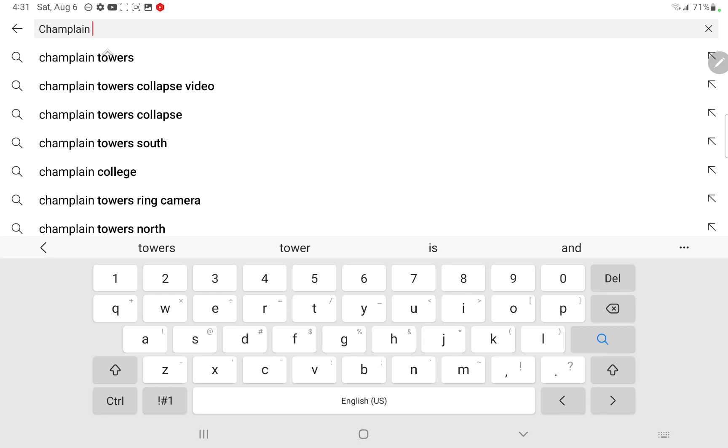Let me jump to something real quickly, then I'll jump back into this content. If you were to search Champlain Towers on YouTube, you wouldn't see mine 10 months ago. You'd see Tool Time's videos, doing everything from a tractor or forklift driving on the deck, to tiles in the bathroom, a granite countertop in his sink, to planter boxes. He's doing everything to make money off this. He's milking this thing more than the Miami Herald.

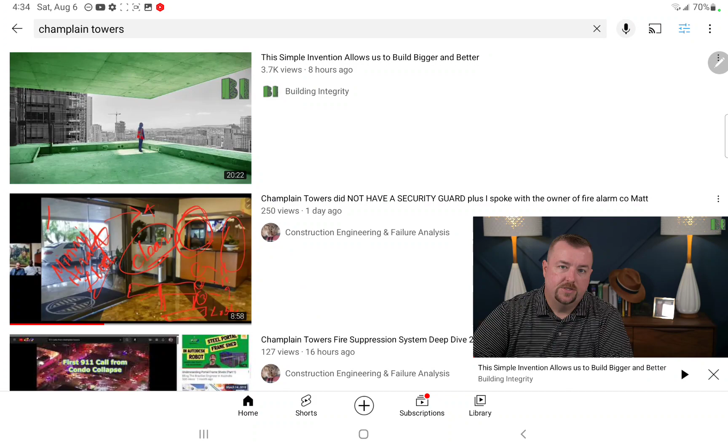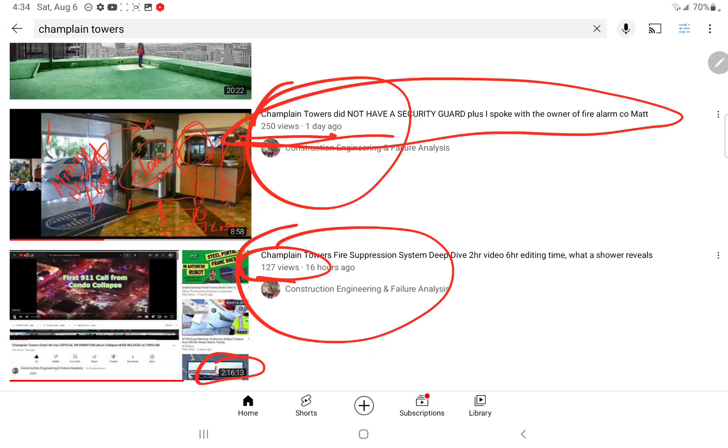Now you see in the past 2 days, it says, oh yeah, you're there. But look at this video here, this is the one I just put out, 250, don't forget that one. Let's do this one, the 2 hour 16 minute video, 127 views. Amazing, right, all these views. And that's because you only could find me under today.

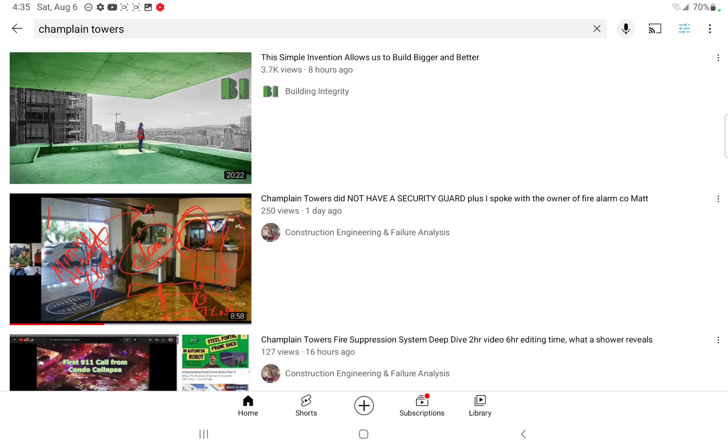Now watch what happens when I show you why I'm not getting any views. Because of my NIST video, when I put that out there showing the destruction of evidence, they found my source of the video, which was the guy across the street. The guy across the street contacted me and said police showed up at his door and said stop recording. And he stopped recording. And then my videos went from thousands of views per day to where we are now.

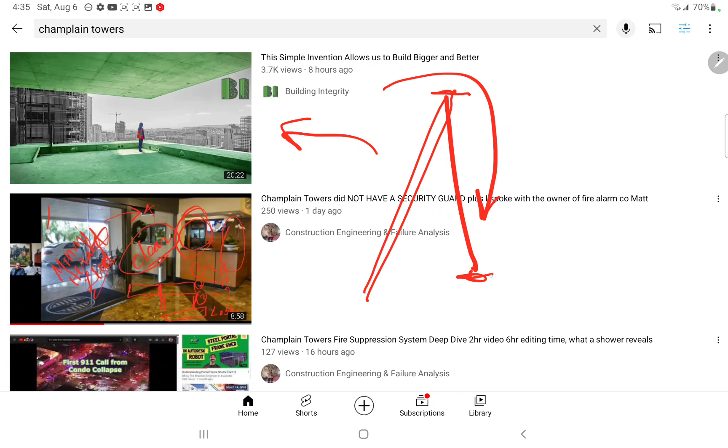Why? Because Google is doing something called shadow banning. Shadow banning is a form of gaslighting, it's mental abuse if you will. Instead of putting it out like you see at Champlain Towers, showing up under today, they know my content is about Champlain Towers. But instead they recommend my channel to people looking for squirrels. I kid you not. Let me show you, and then I'll get back to the content.

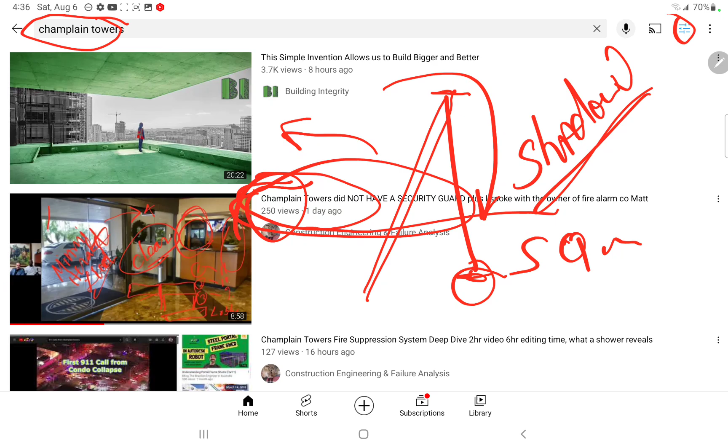So in that same video you just saw, the Champlain Towers fire suppression video that's 2 hours long, well their impressions, what they're recommending to my channel, 1,800 impressions, which is nothing.

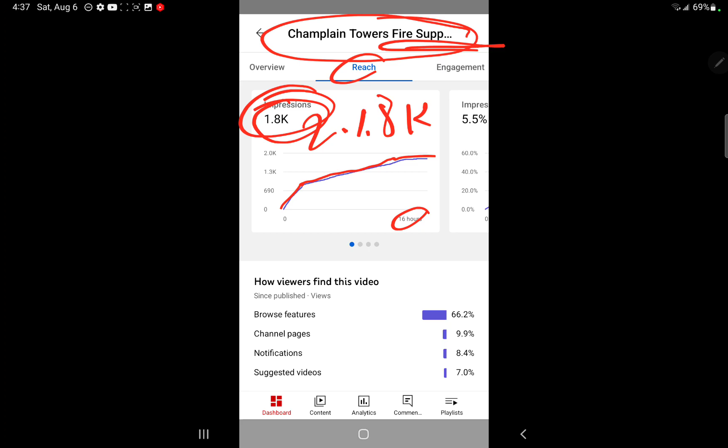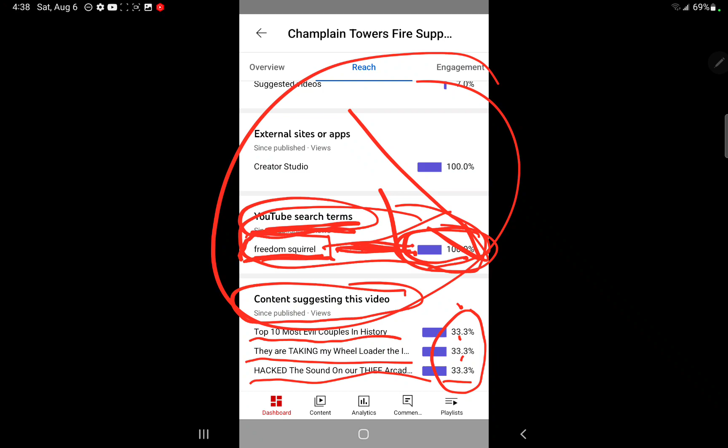So here's Freedom Squirrel. Because we must, Freedom Squirrel. I searched Freedom Squirrel, well let's see. 15 hours ago somebody put something up, didn't even know about it. Some people have to work for a living. Freedom Squirrel, Critterz Rule, whatever. Freedom Squirrel, whatever that is. Freedom Squirrel's a channel, defender of ants. Well, it appears that I am not showing up under Freedom Squirrel.

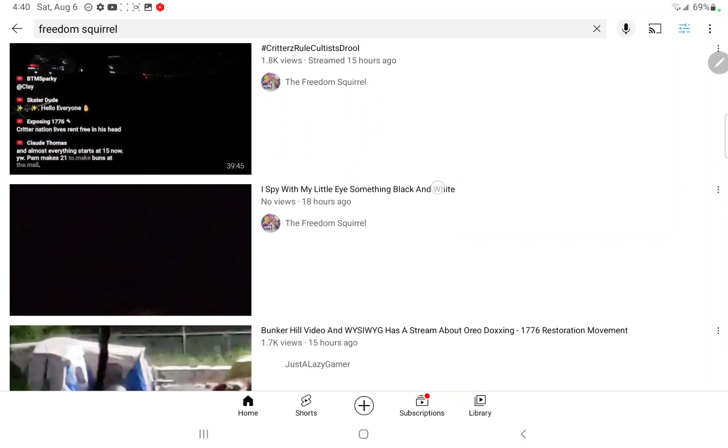Let's change these settings from anytime to today and apply. Oh, so YouTube is telling me I'm in the top search, 100% from Freedom Squirrel. I put today, and my own content that they're saying is related to Freedom Squirrel doesn't show up.

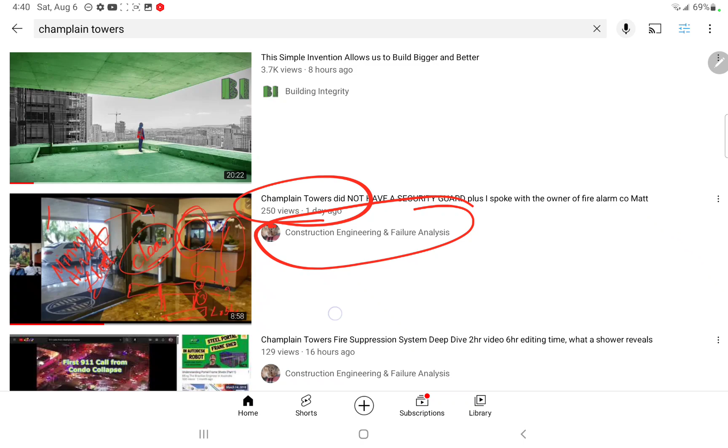But if we go to Champlain Towers again, Champlain Towers, and we search, again I don't show up at all. But they know my content is about Champlain Towers, because when I change the settings from anytime to today, all of a sudden YouTube says, yeah our algorithm works, we know that you're talking about Champlain Towers. We know it, but we're going to shitcan you and put you with some gaslighting bullshit about Freedom Squirrel.

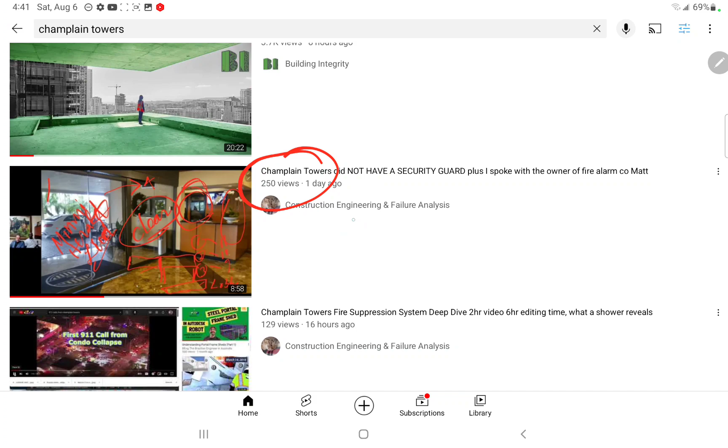And each one of these are the same thing, same deviation of craziness, and of craziness with the way they're connecting me. So let's get back to the content. Just want to show you why this content's not getting out there, because of shadow banning by Google, gaslighting bastards.

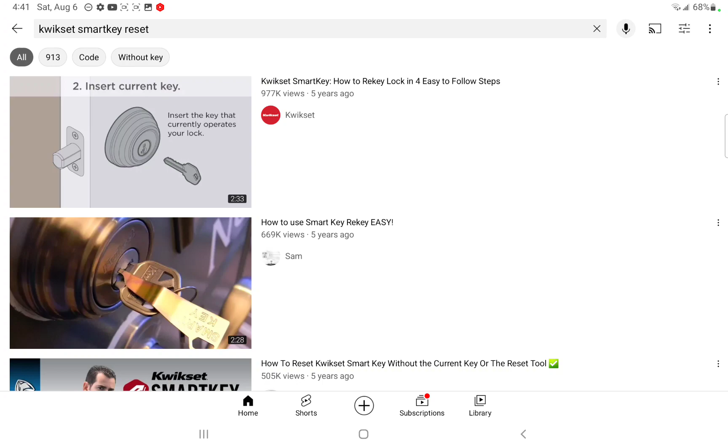But I just typed in kwikset smartkey reset - it's not even the title of my lock thing. But let's scroll, I'm on the first page right here, the first page with that lock. Now watch when I go to that content. Wait for it. Oh, it's 6 years ago, and it's still on the top hit.

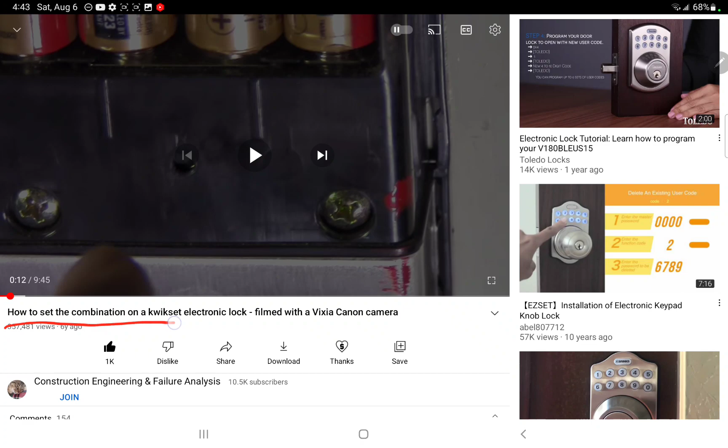So for people who aren't familiar with the lock, 357,000 views. It's 6 years, and it just sits there. And I have a better version of it, but that one doesn't kick off. This one is still promoted by Google a lot more than the other one even - it's another channel anyway. Oh, and so noteworthy, there's a title: How to set a kwikset lock. I even put the Vixia thing there. They knew it's about the lock. So the algorithm works.

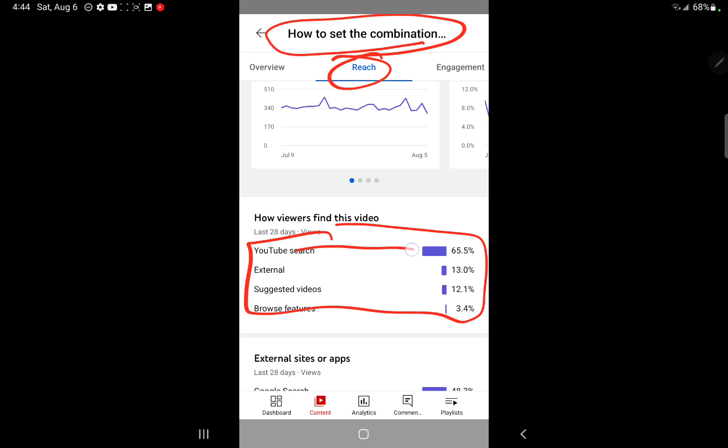So now we go to the Kwikset lock one. That same thing, I'm putting you in the reach part, showing you, and it tells you where the links are coming from. YouTube promoting it 65% of the time, it states. As I scroll up, it says it tells you where it's coming from: Google searches, DuckDuckGo, Yahoo, or Bing, etc.

As I scroll up even further, it tells you YouTube searches, search terms, past 28 days. If you look at Kwikset, changing, digital deadbolt - Google understands fully how the algorithm works. It works, and there is no mistake about it.

As you look over here, suggesting content: Kwikset, SmartCode, programming code, EZSET locks, installation of electronic keys, and the list goes on. The percentages are all over, variable, but it's a huge list. But Google stays focused, save one item that is Kwikset.

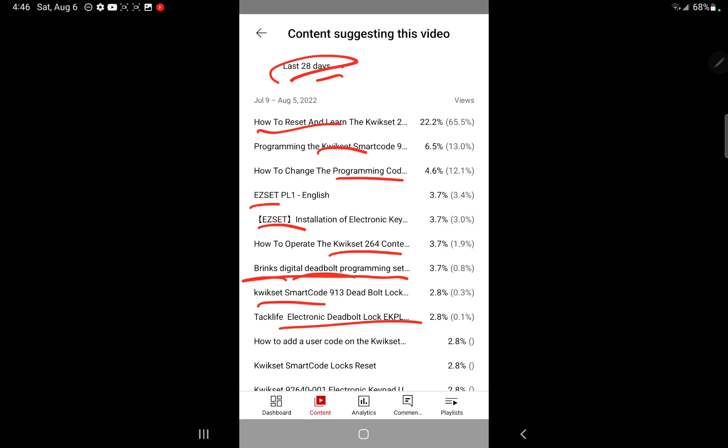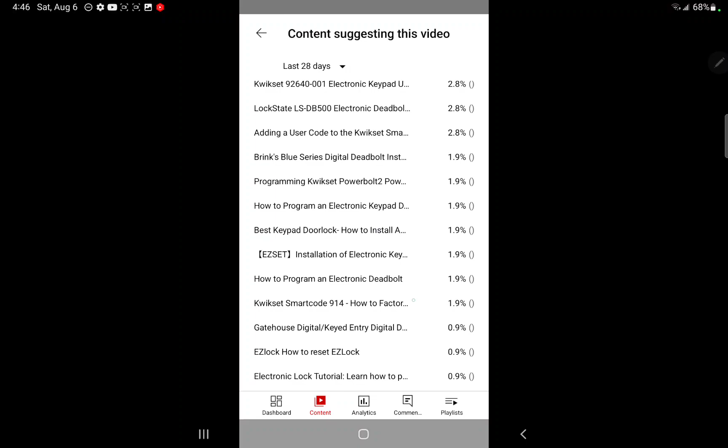Here's the longer list, 28 days: Kwikset, programming code, EZSET, Kwikset deadbolt, smart Brinks programming, Kwikset electronic deadbolt, Kwikset smart locks, and they know the content all the way down. As you look at it, door locks, locks - the algorithm works, all right.

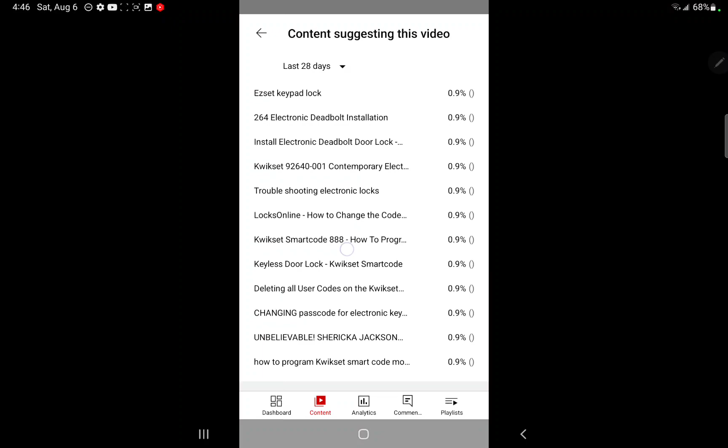Yeah, actually all of them - this one's not one that was off by one. This is all lock stuff, look at it, all locks as you read down. Oh, maybe this one right here - that's the one, Kwikset. Everything's there, but this one's got zero views from that anyway.

It states, but yet how did you get a percentage of 0.9%? But zero views - they have it dialed in with all of those, and it doesn't pick up until they covered it with all of those search engines if you were going to search it. But it doesn't equal the ones that work with these numbers here. They're covering it down below for search terms. But if you search for squirrels, I don't even come up with this thing - they programmed me on squirrels. So I'm showing you the algorithm works.

This is what shadow banning looks like. Now let's get to the content, baby - it's worth your wait.

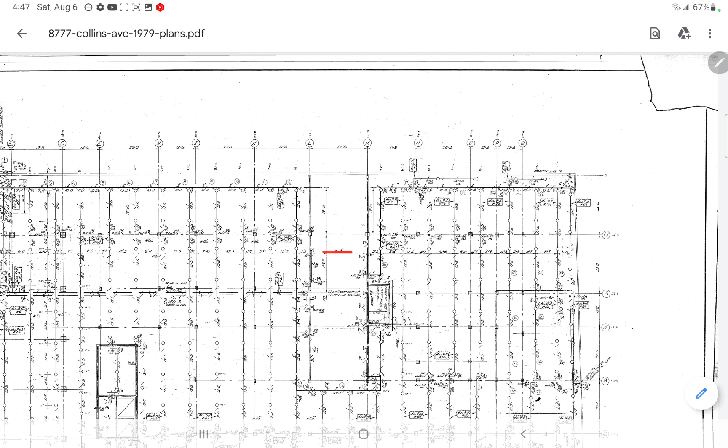So jumping into the content, I've been working on mapping the water sources, multiple directions. Just so you know, there's a stand pipe here - this is the pipe that goes all the way up to the roof. From that stand pipe, they shoot off and hit each floor, sprinkler systems, including maybe outside the wall there, maybe a fire hose. I'm not sure of that yet - it's not really relevant to what I'm going for.

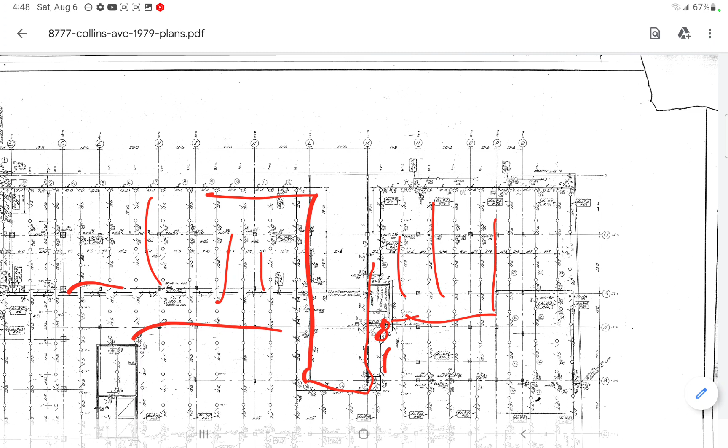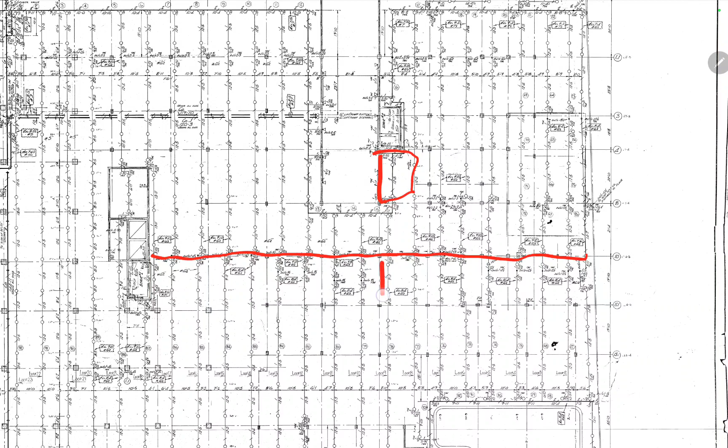I'm looking for the water source at the base of the structure. I got to draw this line - so here's the face of the building. Here's our last parking spot over here, here's the parking spot for the black car, just so you get oriented, and it would be a parking spot over here. Your vehicles are coming down this way, right, and they can turn this way, right?

And vehicles can turn this way, and then they can park here. Yeah, something can park behind the black car if I remember right, correct? And this is the driveway where they turn and come up, and they can turn and go this way. So this is a clear space, this one.

Butterfly, right there - that's my butterfly roof, right? I told you guys about butterfly roofs, they're the 1950s type thing. The gutter's down here, this is what it looks like, this is what this looks like in the collapse. Remember, we have the cars that are over there.

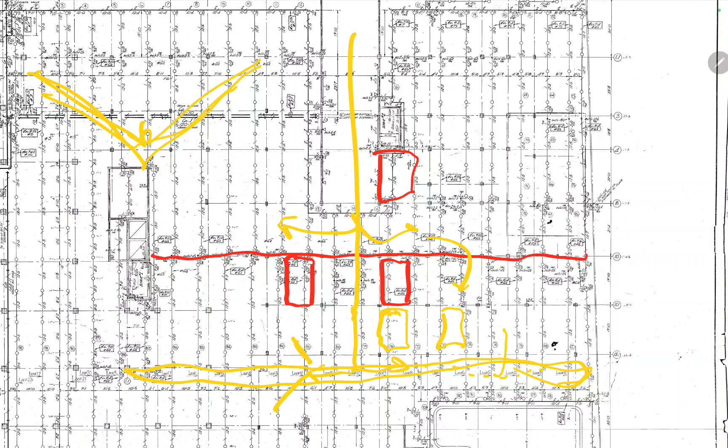Clean this up a bit. Oh great, I brought up - let me edit. So this would be the red line, the face of the structure, and remember you have the decks out here, a ramp there, another deck, a little planter box over here.

They didn't go down - right here is where we have the fractures, remember the fractures that are here. We also have fractures outside of this one, and that fracture, it rotates there, right, leaning down to that. So I have a fracture going that way, the rotation, which puts us in the butterfly. But we also have a fracture here, and this is where the core sample was taken roughly, and that would indicate to me that there's deflection going on over here also.

Deflection going on to get this fracture here, a rotation.

And that would be that one. Okay, let's go to thinking of the near lady, the mom, Mama Bear, noticing and observing the cars going down.

So then this is our collapsed area. In this collapsed area, I will go as far as saying I believe there's 2 collapses, at least 2, right?

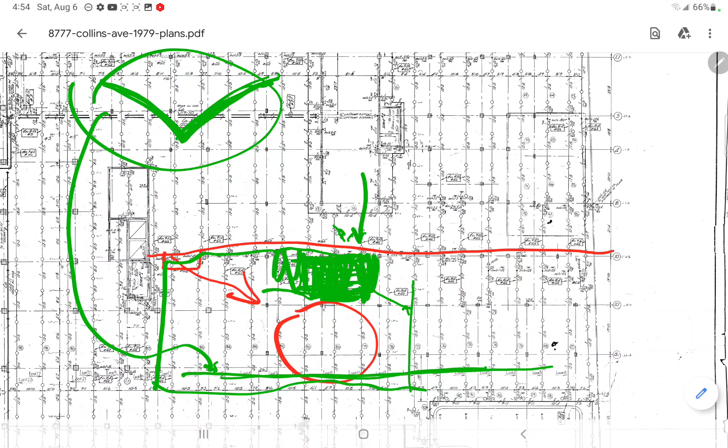Considering he looked out, she looked out onto the pool deck and said the cars were down. That was the extent of her visuals - she stated she saw the cars were down. She didn't say, I looked over to my apartment and saw my pool deck, my porch was missing also. So that's why I have at least two collapses going on here.

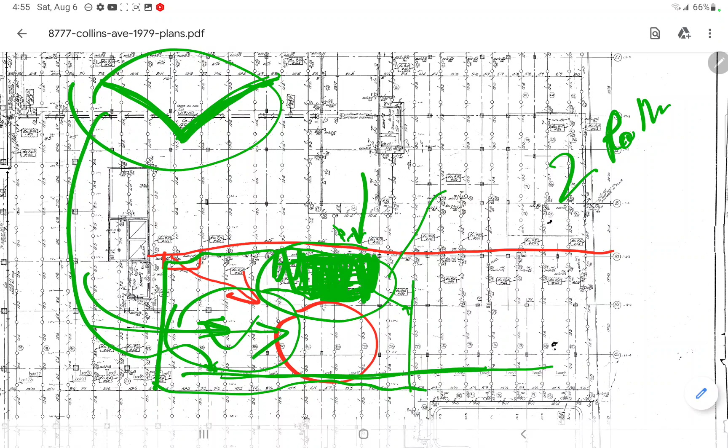1 and 2, at least 2. Another video, more videos - I'll get into that.

Let's start with a clean slate, putting this back in place. That's the face of the building. Here's our driveway - I'm going to change the driveway to this color. So here's our driveway, we can turn and come here and park here.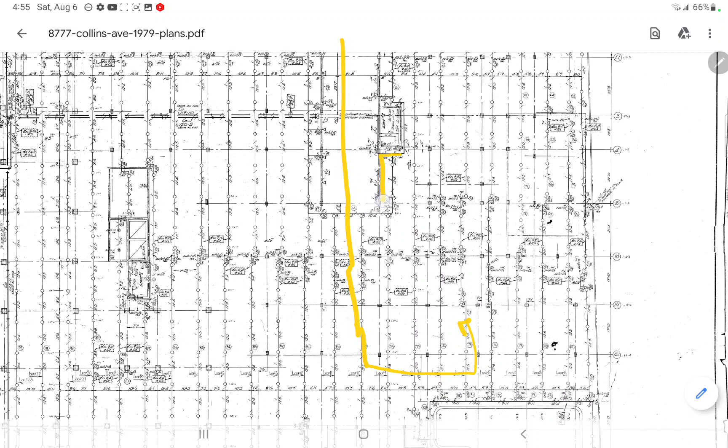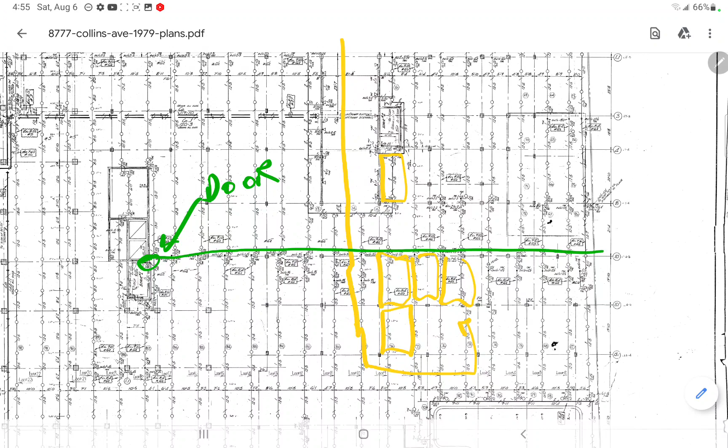We have cars parking here, here, here, here, parking behind each other - the cars can do that. Let me get that face of the building back again. And right about here is a door that's still present. There's a ledge over there where you can walk on it still, and it goes like that, and the planter box is right here also. So that is existing and didn't go.

And here we have a fracture. Son of a bitch, planter box. Let's do the planter box this way.

The door, face of the building, car parking, and I'm coming down and turning and coming in - so car parking. This is driveway action - I was going to say DW, but that might stand for dishwasher, so driveway. Right, so here's a driveway.

This is the butterfly, right? Butterfly, I'll zoom that up. I just told you about the deck being in multiple places here, so the deck is probably still in place, like that.

Over here we have that fracture that I pointed out in another video, and then NIST came within a couple of days saying, we want anybody with photographs, please send it to us - you don't know what you might have in the background. I find that ironic because I think it's NIST that initiated the shadow banning of me, and yet they're watching the content and they're not releasing me. So they're like, we're double dipping.

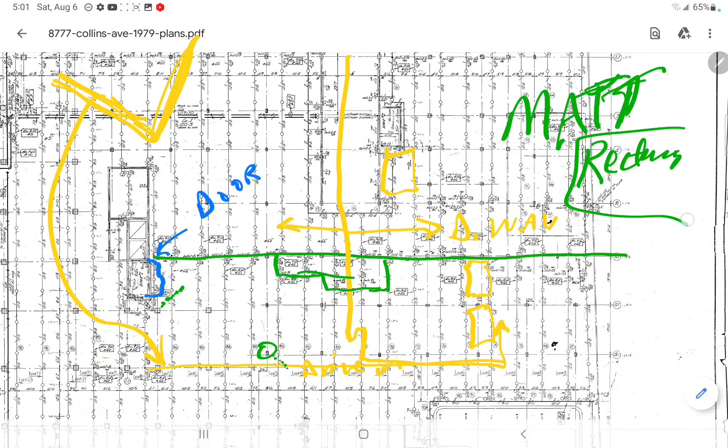All right, let's go from here. This is the other one where I showed this in the rectangular array, rectangular array ruling under engineering, ACI. This rectangular array's percentage is off, it doesn't meet the criteria. This one alone is out of bounds. This is defective, out of bounds, under rectangular array, the support system.

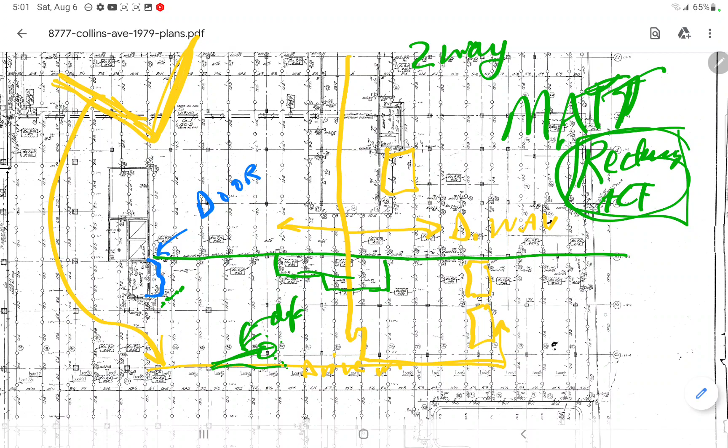I don't believe this is a two-way slab system. I don't care if it's posted as a two-way system, I don't care, I think it's a lie. I think it's a lie to call this a two-way slab system. I think it failed, and I did it on purpose. I think it failed, I'm putting this back here.

And let's now change colors and show you this. So I'm going to start from the building, and I'm going to jog. I'd like to step back 8 inches here and maybe 10 over there. There's a couple of step backs that I'm going to avoid. And now let's use the columns back here. Okay, I'm going to jog.

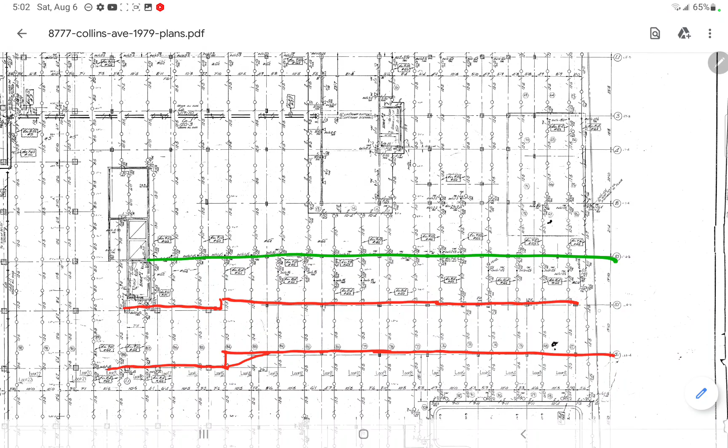Now, I took liberty jogging like that. I probably should have done that, right? You know what, I will do that. Unfair to me on that one, because I should be more sharp with it.

And this one. Ah, shit.

Now these set back, this one and this one, they set back. It's a jog like that. So what part of this looks like a two-way system, a two-way slab?

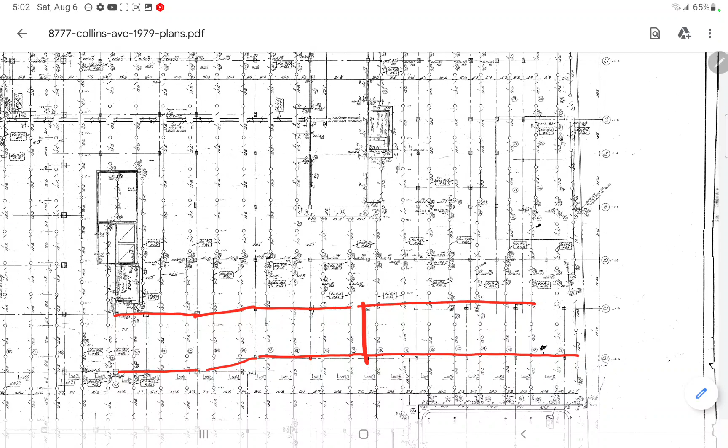Let's put some reinforcement in there and re-inspect. So here's, really?

Okay, I've got the back wall. Let me finish, I'm going to stop there because that's where that one goes.

So I want you guys to look at something, loops. All right, it's in a future video. I'm talking about loops also.

Loop 9, loop 8, 7, 6, 5, 4, 3, 2, and 1. Loop 10, loop 11, loop 12, loop 13, loop 14.

Here's a building here where the planter box stayed. Loop 15, 16. Loops are the sprinkler heads, the sprinkler systems, the piping that goes from, I'm going to parallel it.

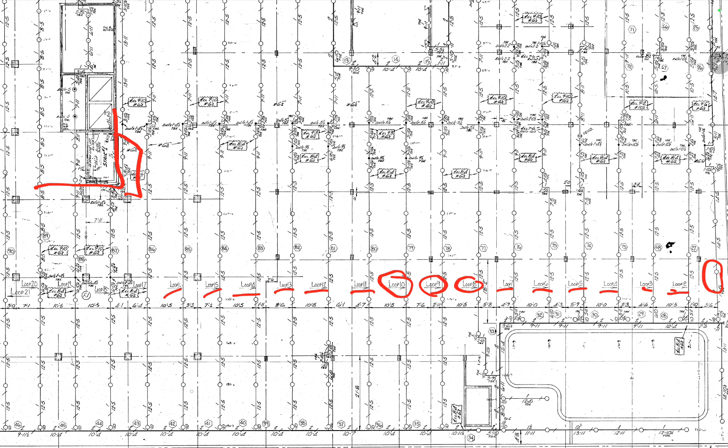That pipe right there, it jogs and goes up to the other pipe, the main, the distribution pipe, if you will. And this will be a distribution pipe down here also. This distribution pipe dead ends back here in the utility room.

That's where Matt showed what he was looking at there. It turns, comes this way, and it loops around the outside. All right, it loops its way back, clearing the screen. Ultimately, it loops its way back to the pump house.

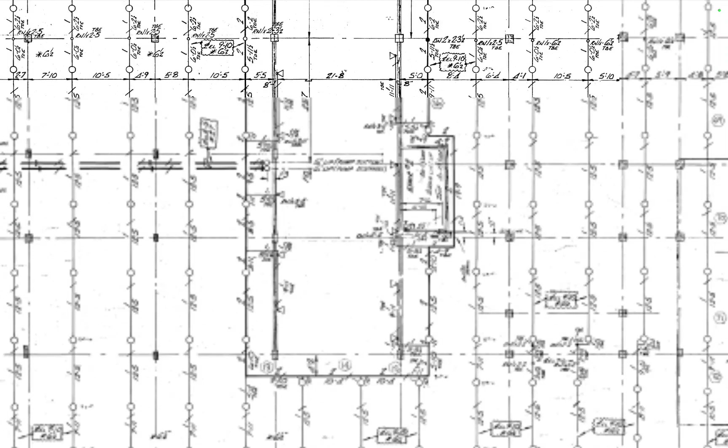Supply coming in, suction side. It has a jockey pump there, which helps keep the prime going. It's not the main pump, it's a smaller pump that keeps the prime, the pressure in the system.

And I think they have a separate system, I don't think about it, looking at different views. And I made a mistake. I don't know if I showed you guys that video yet, but I had the wrong setup, because these drawings, they mix the

112 unit building, that's the other north building. The domestic water pump system over there is on its own system. I'm not sure if this one shares or if it's on its own system also. It's to help get pressure in the entire building.

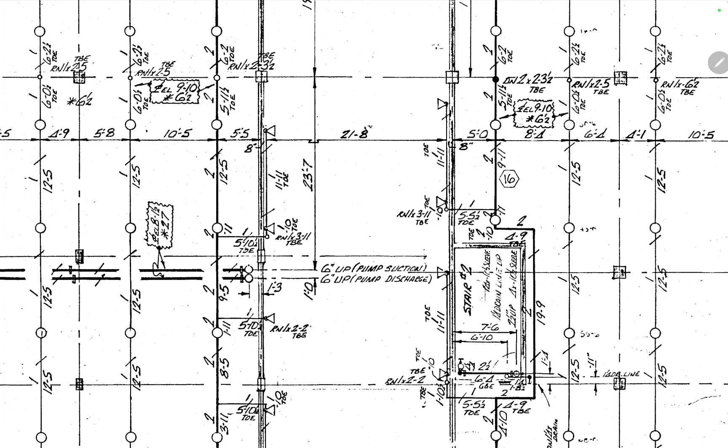But over here it says suction and discharge. These are 6-inch pipes, I believe, coming in. And over here is EL, this is center line. EL, elevation, that's 8 foot right there, 1.5 inches. And that's center line of pipe.

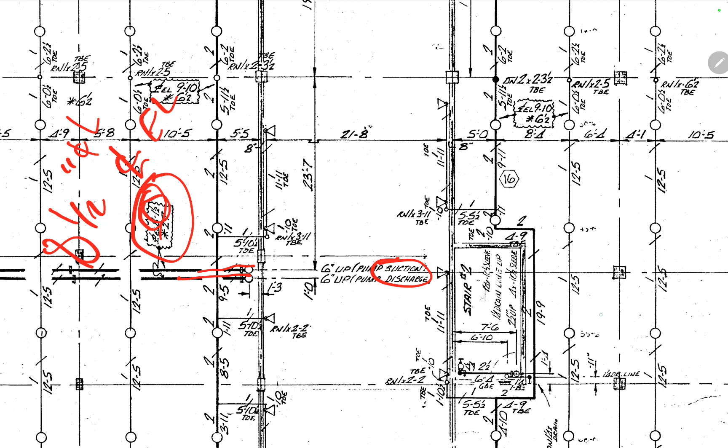And it's plus 2 point, clearing this out, plus 2.2 inches, 2 feet 2 inches, additionally to the 8 foot number you would use.

And that's because the bottom of the ramp is our benchmark that they work off of. I think it's 2 foot 2, not 2 foot 10. I think it's 2 foot 2 they use. And so it's 8 foot off of the top of this one. Whatever these numbers are, the elevation numbers, it's off of that one.

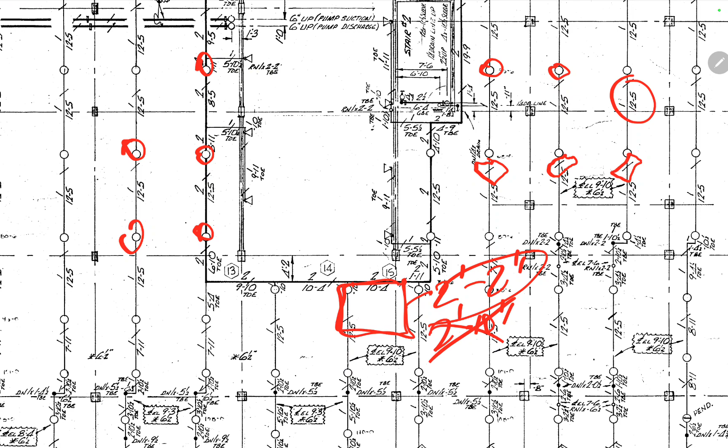Now, I don't know if it was clear in the other video, but these are the anchors on the ceiling, these little hash marks, and these are the different sprinkler system heads. All right, different patterns. These all look like the same patterns, but they probably are different patterns.

This is, I'm gonna have a little fun here. This is a jog in the piping system. Let me bear with me. So

It's hold on, it's got to load. I'm just gonna tell you, I'm pulling your leg again. All right, so coming down here, I want you to remember that this is, let it load. I do not think these are amended plans.

Amended with the deck elevation changes. Remember, this deck was elevation changes took place. This is an elevation change here, here.

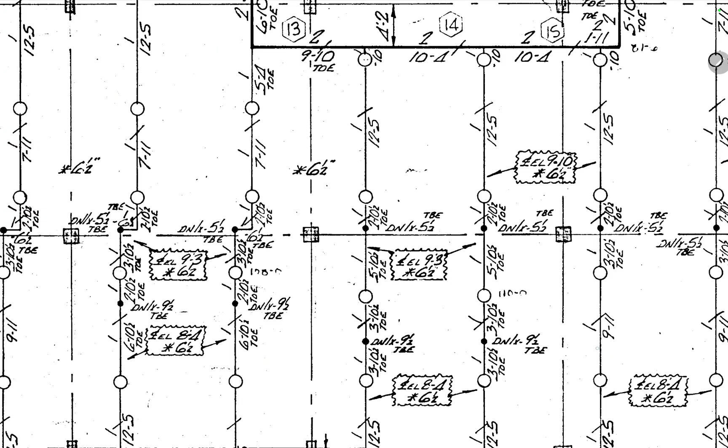Interesting, clearing screen. Let me back out, all the way out to the wall. If you guys remember, it's a drop slab detail, right?

Drop slab, here's the 13 feet. 13 feet 6. The lobby lounge area is 13.6 or 13.10. My brain's all frozen up. Consider, take that with a grain of salt, whichever one I'm at.

And down here is now like 10 feet, right? So the plane of the building is here. So I said like, meaning is I forget my damn numbers. 11 foot 10.

I'm doing another project, and I got other numbers in my head, so I'm losing the numbers I had memorized for this one - they're being replaced, deleted if you will.

Here's 12 foot 5, 12 foot 5 - that's the ceiling, and that's center line from 12 foot 2, from the 2 foot 2 elevation. That would put it at 14.5. We know the deck isn't that high - that's the underside of it.

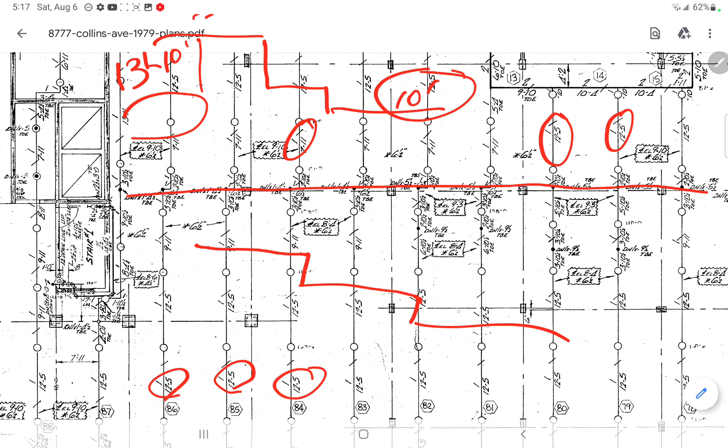Their numbers are quite strange, but nevertheless they're their numbers. Here's a 12 foot 5 over here, here's a 7 foot 11. The profile of the ramp coming in, the roof line, looks something like that. This will be the lobby area and hallway, room 111 here, lobby and hallway.

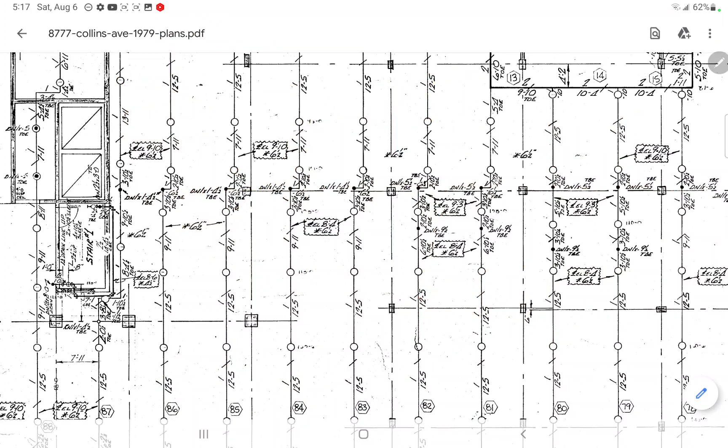You make 3 steps up, and then you're into a utility room, which is the washing machine room. Then you make 3 steps up again, I think, not 2. Now you're in the pump house room, the pump house and the generator room, which is here.

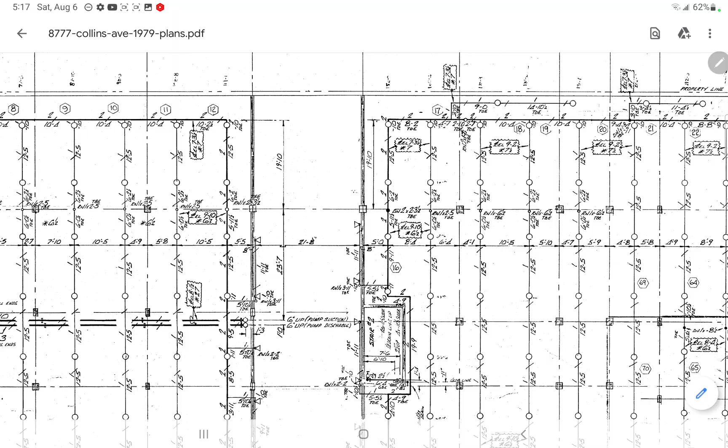So this is the higher elevation. There's one more elevation, and then there's the hallway. You make steps, you turn, and you come into this area. I'll get you a better understanding of that in a moment. This one right now, I just want you to start programming in your head.

You know how you teach somebody, you go over and over until people go, I think I know what you're talking about as soon as you mention the plumbing line. That's why I'm being redundant with these videos. So you can see the plumbing line, the main line going around.

Realize there's a stairwell here. Stairwells, if you think about commercial buildings, where you see the fire department's stack that goes all the way up to the building, up to the 12th floor on this one, including maybe up into the 13th with the penthouse. That's where you grab each one of your lines off of to work each floor to run sprinkler systems, and also another fire hose connection probably in the hallway of each floor.

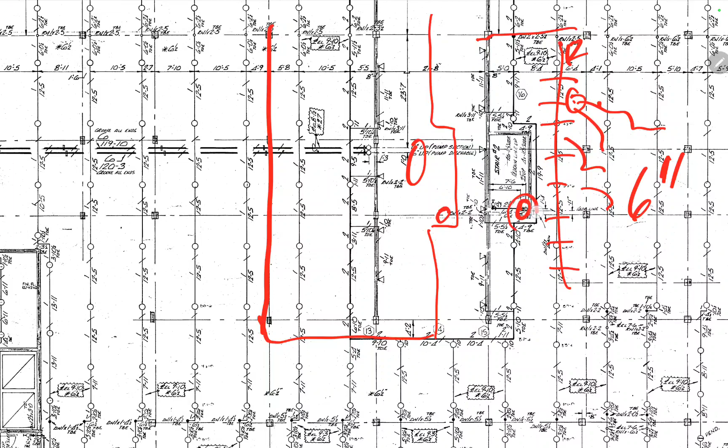And it's coming off, in this case, a 6-inch stand pipe, I believe. It's just like I said, it's a stand pipe - you can look it up, look up 'stand pipe' to educate yourself if you need to. There is one over here. And in this building, they put another stand pipe on that's the tower there, and the tower that remained has a stand pipe.

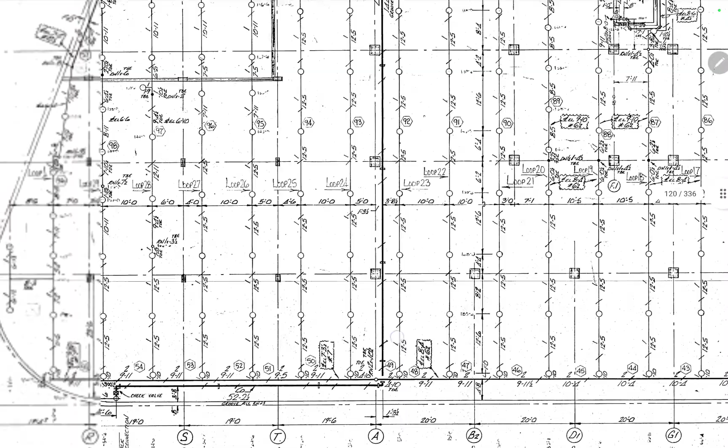Here's your stairs over here, should be a stand pipe there. I remember the other one - I'm getting the other drawing mixed up because I remember it's like a stand pipe back here. I don't think it's back there, I think it's in the stairwell over here.

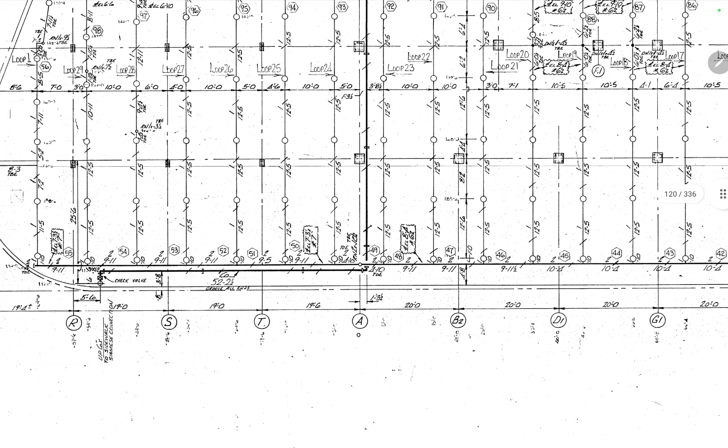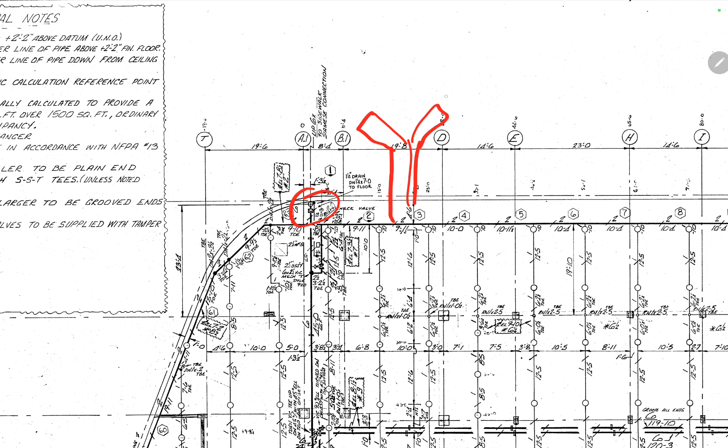And then we have this piping here, which gives you a hose connection outside. That same pipe connection comes all the way across the structure, and it gives you an exterior connection here. I think it's maybe one like that - the two connections. If it's not this one, it's another one down to the...

I thought I saw one to the far - oh, it's the other building. I might be at the other building at this point. Yeah, I don't see another one down here. I think they used a fire hydrant out here somewhere, right? Isn't there a fire hydrant outside? And this one gets that, the building's version of the fire hydrant, external fire hydrant off of here.

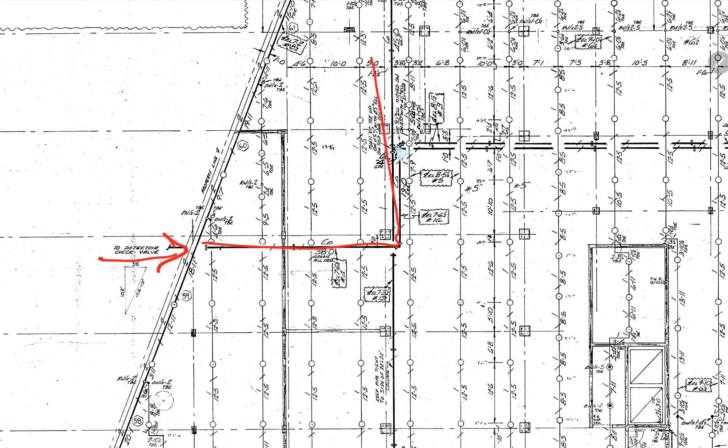And our supply line, I think, is here, coming in. This is the structure. The building here comes in, comes across there - that's the suction side. So we make the suction side all the way into the pump room, which is the top line.

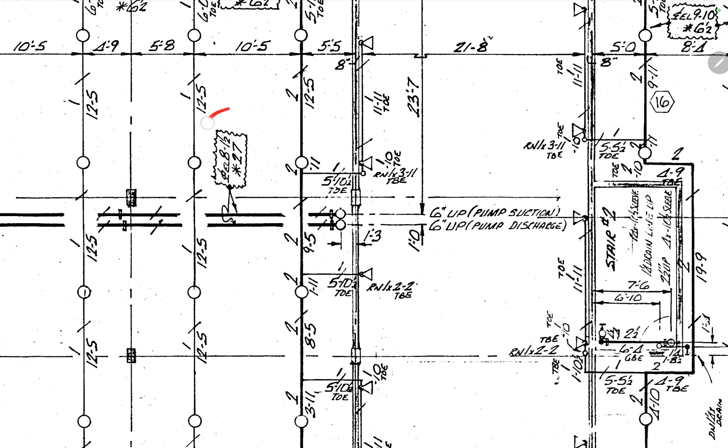Now, if you look at these lines, they're at the same elevation. Both of them should be sistering each other. So if you want to find them in the building, you look up on the ceiling in videos and go, aha, I see 2 pipes lined up coming that direction past the elevator, etc. And there they are - you can look at what's left behind of the staircase, and probably find the penetration, maybe get lucky.

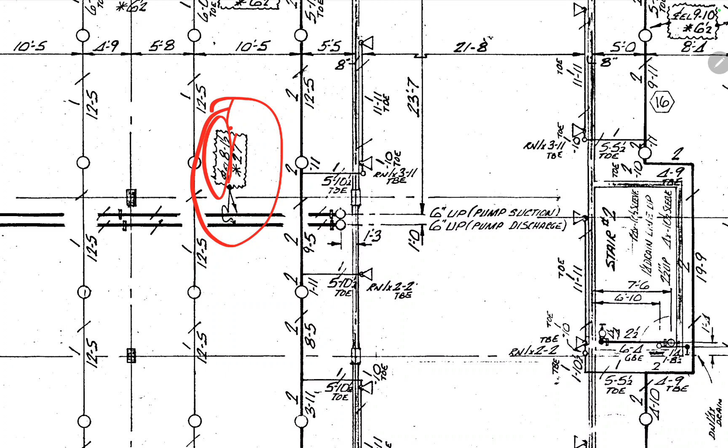But there's an elevation, 8.5 feet, center line to pipe, off of the 2 foot 2 - I think it's 2 foot 2 inches. And there's the mark - there's both of these pipes.

So they would have them sistering each other. And then from there, all bets are off. They go at different elevations. There's 12.5 - I believe that's the indicator for 9.5, 8.5. Yeah, that's crazy, right?

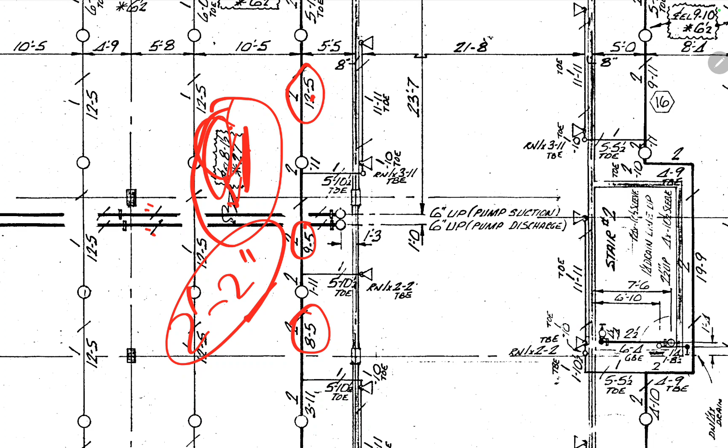Let me think about that. One of them also has... it's loading, the screen has to load. 12.5. So yeah, I have some conflicts with my statements when I see 3-11 and 8-5.

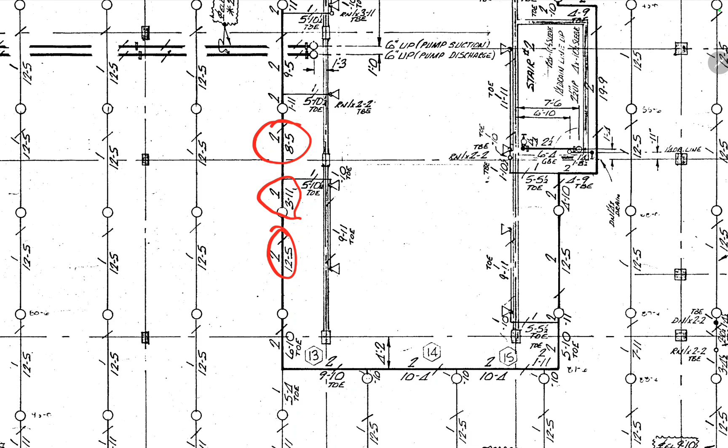1-1. Now, it could go down there and feed a hose bib, but it didn't change size. Or did it? No, it didn't step down. There are some hose bibs here, all right, from the system, but not the sprinkler system. They're not jumping off the sprinkler system. Remember, this is the sprinkler one. So yeah, I have some conflicts there - using their own legends, it's conflicting to me.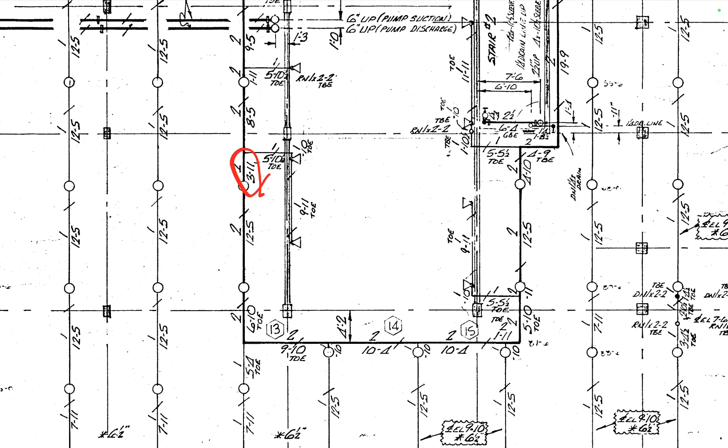3'11" - is there something they need to get down to the ground to protect, and then they come back up? Yeah, no, I don't have that. All right. I know what it is. Hopefully you guys will work it out.

There's 9-10, there's 10-4, 10-4. Well, remember the decks over here are different elevations. We've got a step coming here, so the pipe's going to follow that. And remember that jog of the piping. Let's look at it from this way - where the pipes come across, then they go up, and then back over this way again. Well, that's your elevation changes.

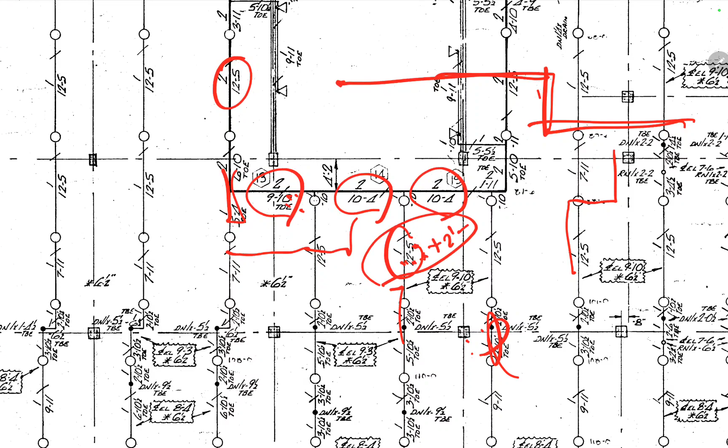12.5 plus is no longer plus 2 foot 2. This number I don't think is legit anymore, so you have to deduct. I don't think this was an updated plan. These were updated plans from that elevation deck elevation change.

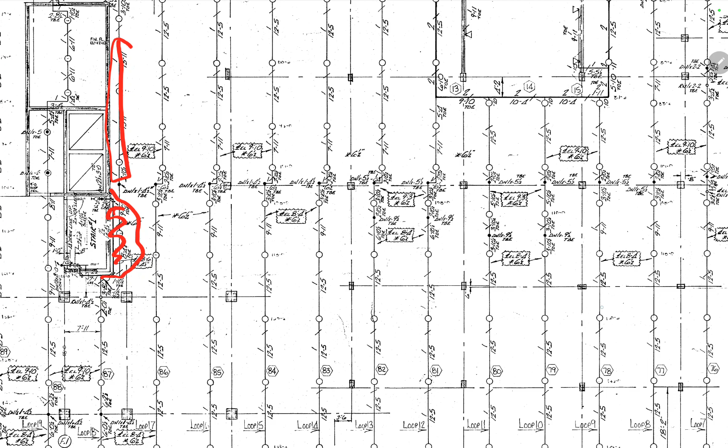So why does this all count or matter? Because once you understand and go over this multiple times, you overlay your deck collapse. So right here is the part that didn't collapse. So whatever's under here, this part here, might have got pulled down, but it's on this side here. And so you would still investigate it to see if it got pulled down and see if it goes back to a reportable...

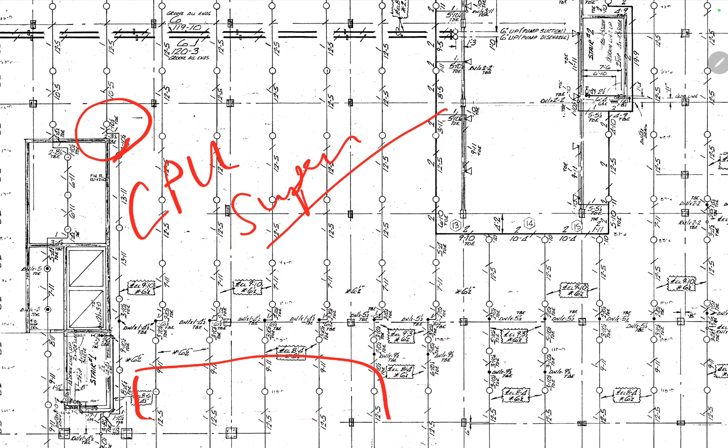...back to the CPU as a supervisory position, right? Supervisory advisory. And once you get the deck down and you can tie it into - if these pipes come down, this one actually is reportable. So when this comes down over here, it rips the pipe down, snatching it, disconnecting a wire, if you will. It's no longer connected to the CPU, and the CPU says, hey, we have a problem here.

It reports to the reporting station, the company - Matt's company - and they state, I guess that's Matt's company too, the reporting one. It might be subcontracted. And they state that, hey, we've got an issue here. So before they can even jump on that, I think before they can jump on it fully, they get the fire call. And instead of jumping on the supervisory one, it goes to shit-can that one for a minute, which it should, right? Priority-wise.

You say, whoa, we got a fire call. Now, they theorize that somebody pulled the station, right? Pull station. And the pull station becomes the fire call. The fire call is instantly ASAP'd by Matt's company to 911, if you will. And I did verify those numbers - they do go to 911, even though the guy just said police.

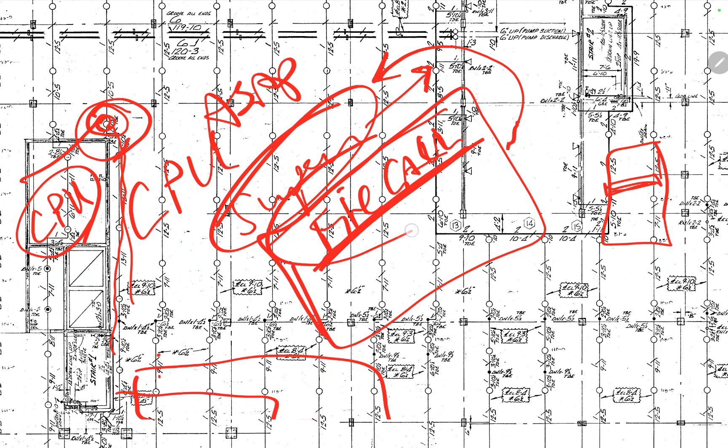So the fire call, they instantly prioritize that as number one, and then they also send out - after that they get this rolling for the supervisory thing - even though the security guard slash concierge stated, said it was an earthquake.

All right, and when she called 911, let's be clear, she never told them that she was a security guard there. She never told them she was a concierge service there. If she would have done that, I would theorize they would go, whoa, wait a minute, you're there? Well, this is the fire board, or maybe it was the fire board. Did you press the all-call system yet? The one-call system - did you get that activated? Please do. Maybe that would have been something they would have said. They would say, hold on, you are the actual personnel there. We need you to do this. Don't hang up.

But she called in like she was just Joe Blow off the street calling in, even though she said they didn't even know her address. Like they said, where are you?

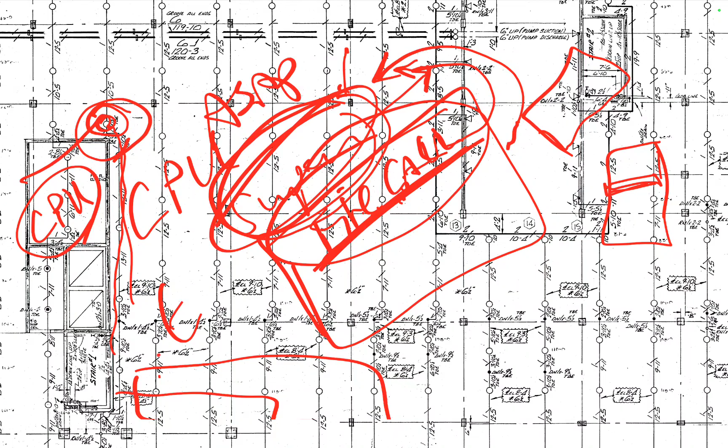So I'm gonna cut this video short, which is 41 minutes. We're gonna come back to triangulating this, and Matt's got his man who's gonna hit me up, and we're going to pound this until we can find which one of these would give us a supervisory call. We're gonna find that supervisory call. Even though no CPU, let me put it this way, I feel confident we're going to find it because he knows the system.

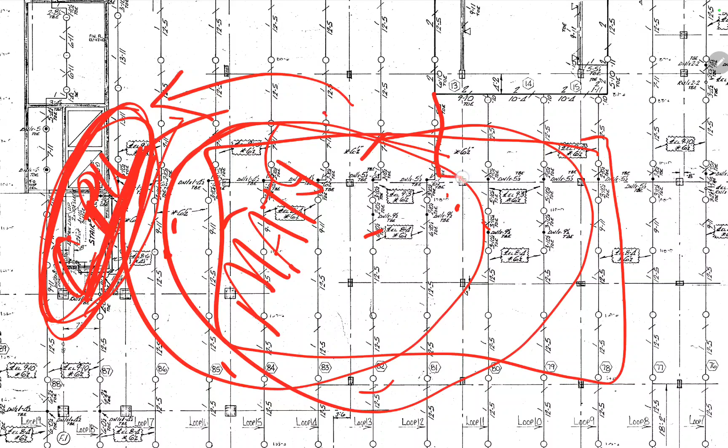And once we find out which one in this zone, isolating that this is the zone that went down first, it initiated a CPU response, if you will, a phone call home - I'm not going to consider this one the phone call home because of the timeline. You know what, I'm leaving this open that this might be the phone call home also, where I call this a secondary break over here. I don't know if this is in that video now, I'm getting confused with the videos that I keep editing over.

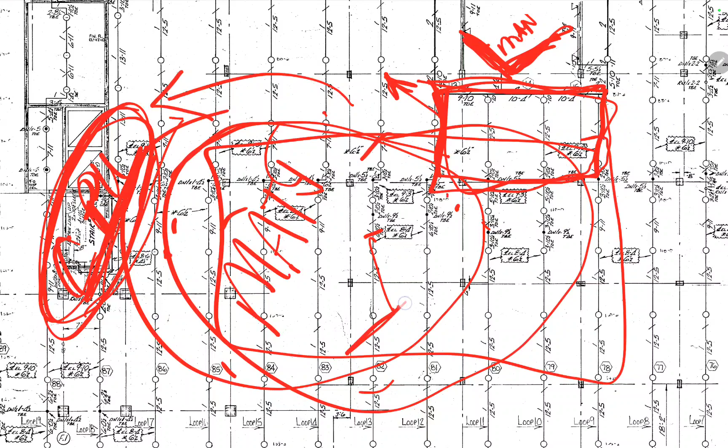Did I state that because of the near sun - the near man, he stated that he observed a butterfly, the butterfly over here. He didn't use the butterfly, but he used his hands like the butterfly. So using him and not this, he didn't state that his deck was missing below his feet as I look out the window or whatever.

Our lady Cassandra Billedeau Stratton didn't state that all of this is gone, including over here where she might have been able to look over the balcony and observe more. She didn't state that this whole area is gone. All right.

Near sun is critical to me. I need to find out if this is a shared domestic water supply, domestic pump. I don't think it is. I think that jockey pump is just for this only, dedicated for the one pump only. The system is dedicated for that.

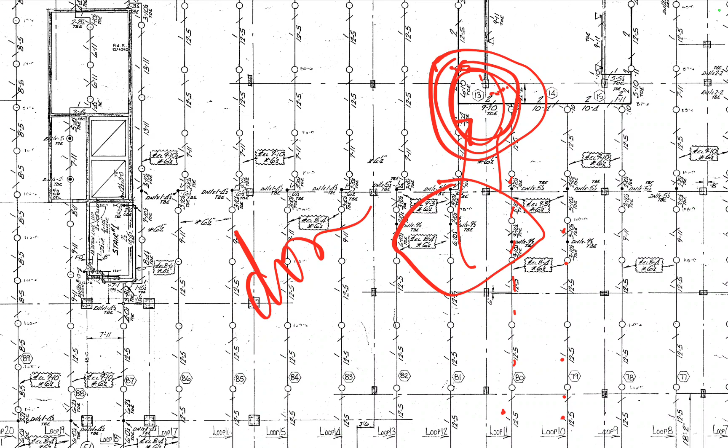Even though I think I found in one of the plans probably the wrong building - again, like I said, I'm getting this stuff mixed up. And I think they might have a dedicated auxiliary pump to service the building.

In other words, from the street you might get a pressure of 35 psi, and that might not be enough to go 13 floors. So they come into here, they go into the building, into an auxiliary pump that would charge the building, keep the building charged. That pump's always keeping pressure up like the jockey pump. It becomes basically a jockey pump maintaining pressure, and that pump would have a short service life.

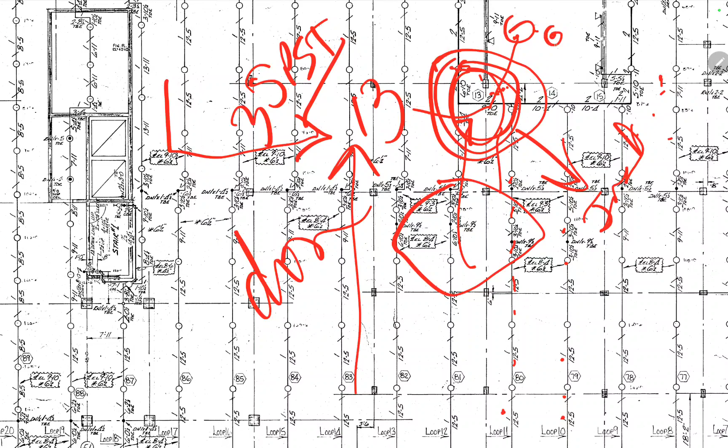And municipalities, they pump that up to a tank, and there's your reserve. Even though the pump is also pressurizing the street all the way to your house. That pump in those pump houses - about whatever you're getting in your house, they're probably about the same here, using Pascal's law of equal pressure. Yes, even though you got a 3/4 inch pipe and that's a 6-inch pipe, you're going to still get the same psi under pressure like that.

Not this one, all bets are off. Your pressure will be greater once this tower starts filling, or if you're on a hill. So let me put it this way, it's on level ground - what I described, everything being level. As you pump up, even the weight of the water then creates more pressure at the lower area. Not in the pump, but anything outside the pump, say another fire hydrant.

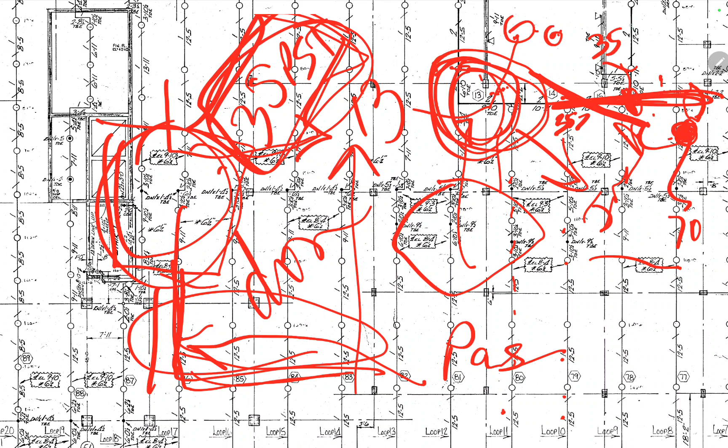A fire hydrant up here would be 35 psi. Down here it could be 70 psi, and yet the pump house can only put out a total of 35 psi. How do you get 70 from that? It's that the higher elevation puts more pressure on that pipe down here. If you don't believe me, I don't care - it's true. I did testing on this, literally testing on the fire hydrants, and saw these exact numbers I'm talking about. So even if you don't want to believe it, that's okay.